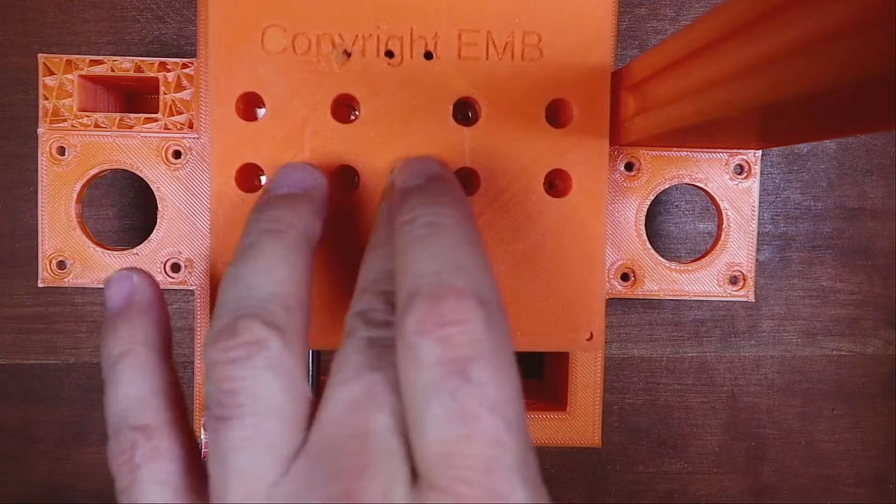So let's see, anybody show up yet? Probably going to be a couple seconds. Nobody knows.

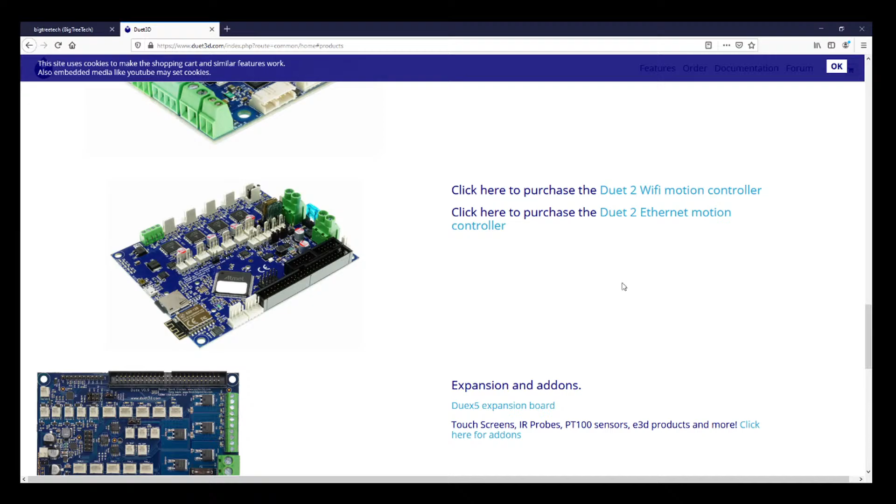So we've got config tools, compatible boards. Let's take a look at that. So there's the Duet, I don't have that. I don't have that either. Let's see, all these are Duets. Let's see what we've got for firmwares. Doesn't look like it's actively being developed, but it does say 32-bit processors. Let's see what we've got for software here. Reprap firmware. Says the documentation, drivers. So maybe this is not the best firmware to work with.

So let's see what firmwares we can use for 32-bit boards.

Okay, so let's see what we got here. All 3D printer firmwares, which to choose and how to change it. This might be kind of interesting, or it might just be painful.

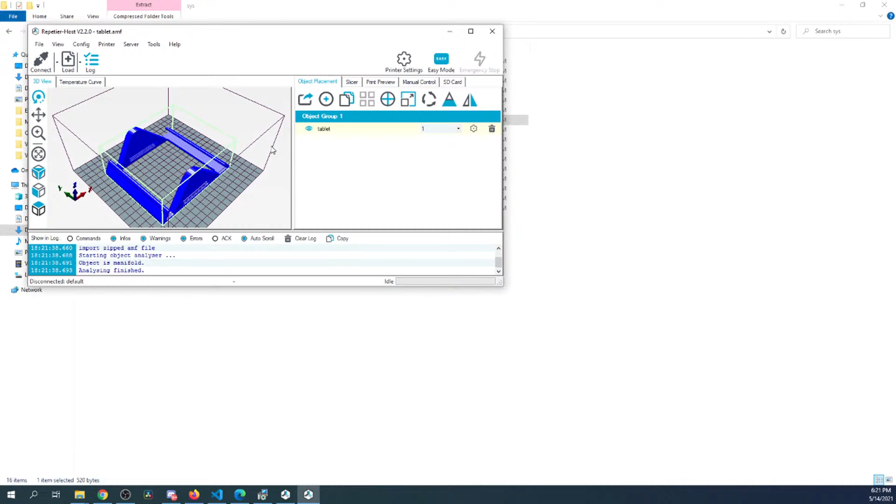So let's say we accept. That looks like a printer to me, or part of something. Might be holding filament, but it looks like you're rendering in here.

Kind of a smooth transition. Looks like there's a slicer here. It says the quality. You can add a brim. Let's see if we can re-render this.

Doesn't look like we can do much. Touching bed. Cura's the slicing engine, I guess. Or we can use Slic3r.

Yeah, it looks like a holder for a filament. It's asking me to say where the slicer is, so let's go to the desktop.

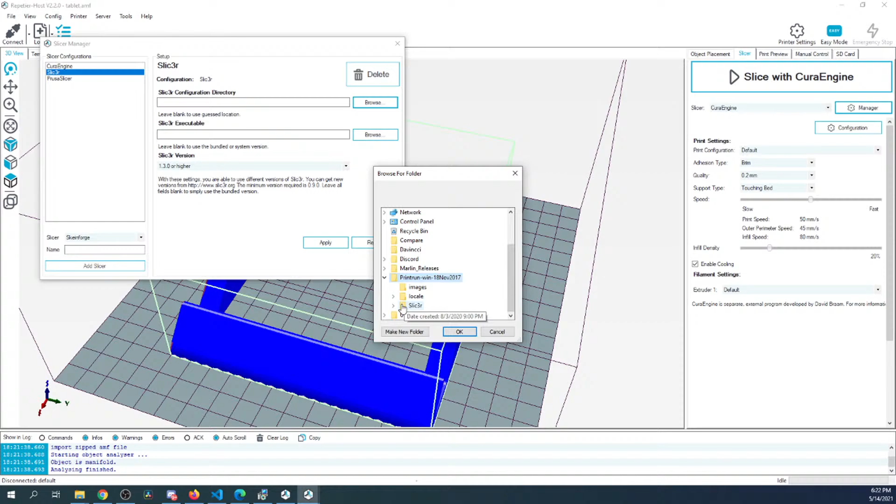So it's in here. This is an old slicer. Let's see if it grabs it, apply it. Let's see. It's looking for the executable.

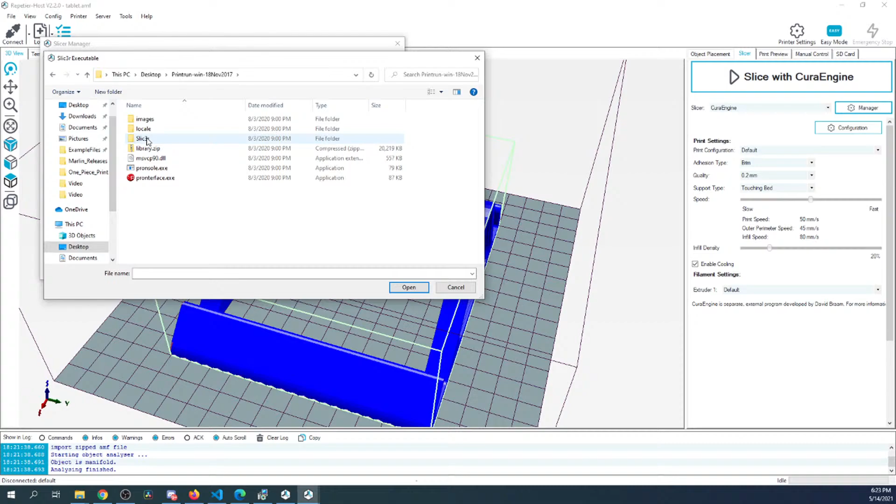Desktop. Slic3r. That's awesome. Slice, maybe?

Anyways, this might be harder to use than I thought. Let's see what the configuration manager says.

So these are start and end. So it's turning off the heat bed here, and there should be something to turn off the extruder, which is right here. So it's setting the first extruder to 0. That's the G code for it. So that's not very interesting.

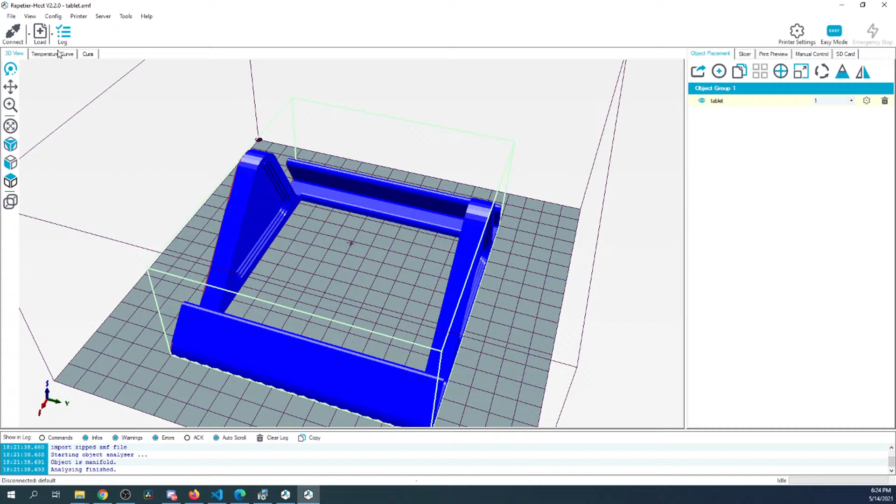So let's see if we can figure out what's going on over here. Apparently we can watch stuff. There's Cura. But it's slick looking, but I don't know how well this works.

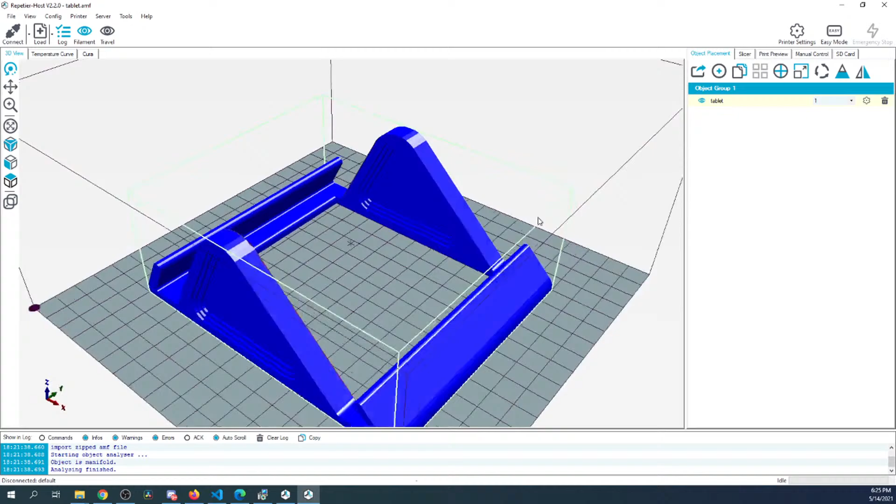Let's try easy mode. Looks like I gotta click over here to move something. Maybe it's export. Test.

I just installed it from scratch just to see what would happen. It's not very fun for me to use, so let's see if we can open this and see what happens. So apparently that might be the file.

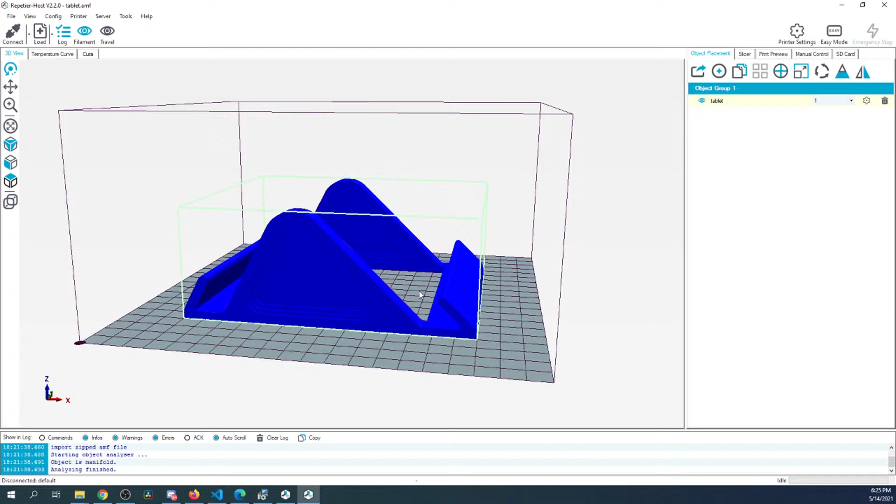Let's see if we can move it around. Add object, scale object, scale maximum. Let's see, 50%.

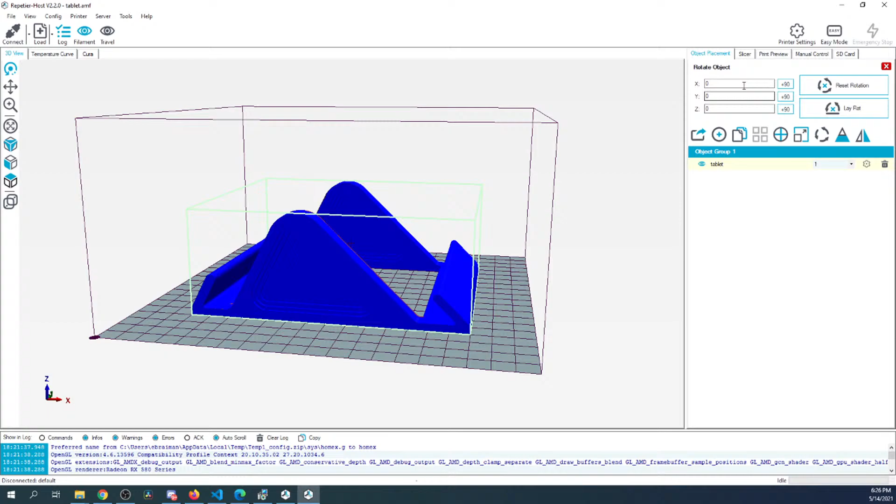Let's try 75%. Well, that's not too much fun. Let's see, plus 90. That's easier to work with though.

I don't know, this slicer does not look like it's usable in most cases. This looks like it's actually connects to a printer, but we don't have one connected at the moment. So maybe we could try that.

Yeah, but so far it's not very interesting software. So I'm gonna plug in an actual board and see if this shows up. So you can hear it.

Let's see, COM ports, it's probably 13. Speed is probably correct. So let's apply. Say okay.

Apparently I can't send any G codes. Awesome. Huh. Can't get in here.

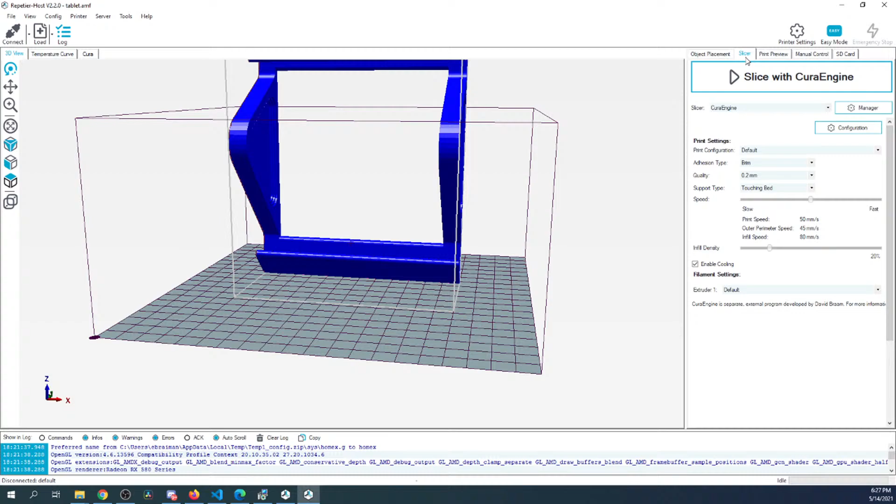Looks like it's pointing to slice with CuraEngine. Cooling's on. Manual control. Why is that not working?

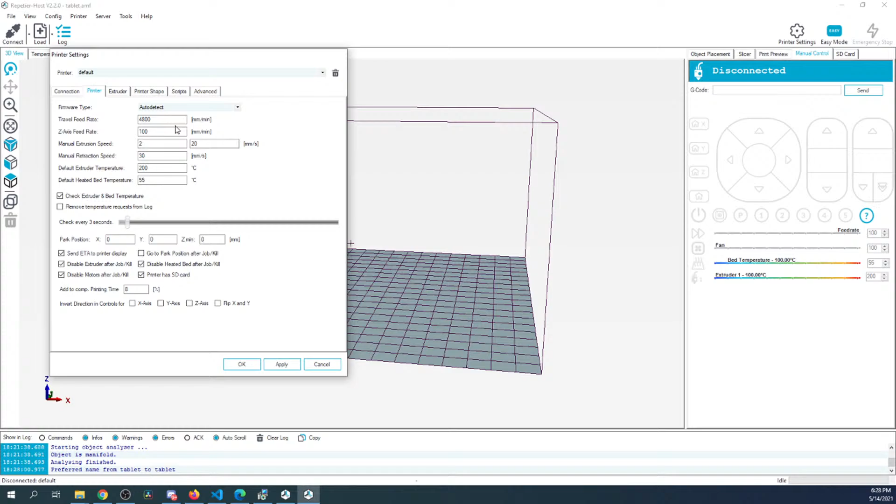Let's see. Printer. Extruder. Shape of the bed maybe. Scripts advanced.

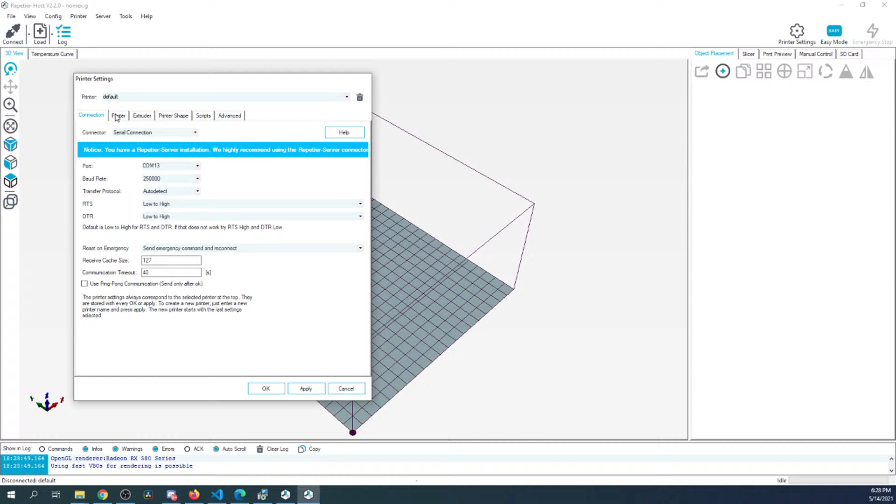Let's try reopening it. It might be web-based too, and that might be why I'm having trouble. So I might have to change the address. Or I have to somehow register it.

You have to click connect on the left. Oh, yeah, I'm looking over on the right. Let's load a file.

Connect doesn't work. Let me check the board. The board looks like it's on USB power, so it should at least show up. It's on the right port, I think, so let's check that real quick.

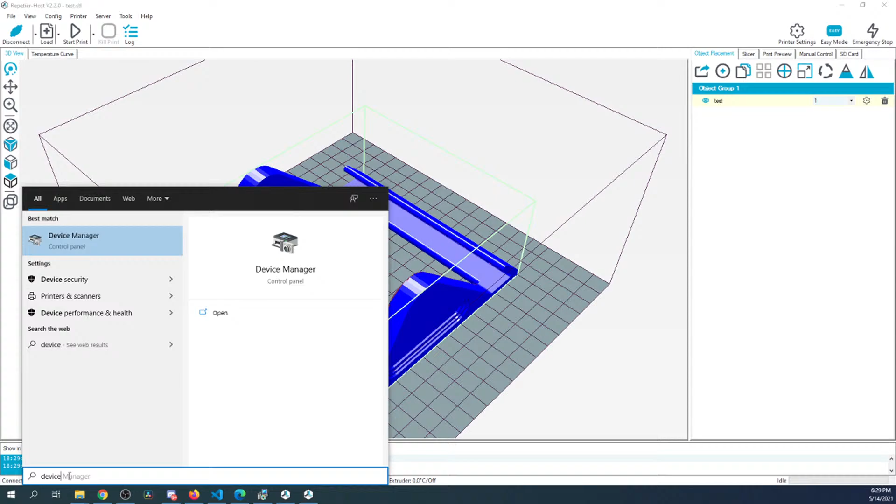So if we go to Device Manager, and I slide this over, go to Ports, it's 13. So why is it not working? Oh, it says connected right now.

So let's try G codes. Manual control, there we go. M119. And that shows us nothing. So there's got to be some kind of output display someplace in here.

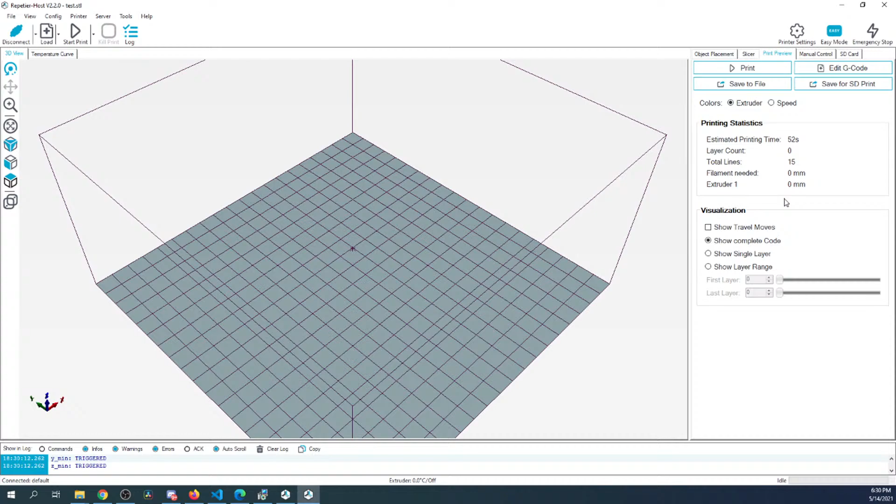Manual control. So they give you the ability to send a G code but not see anything.

Let's try echo. Let's try this again. M119. Oh, sorry. Did not expect that.

That's where it's showing up. So obviously I'm not seeing things.

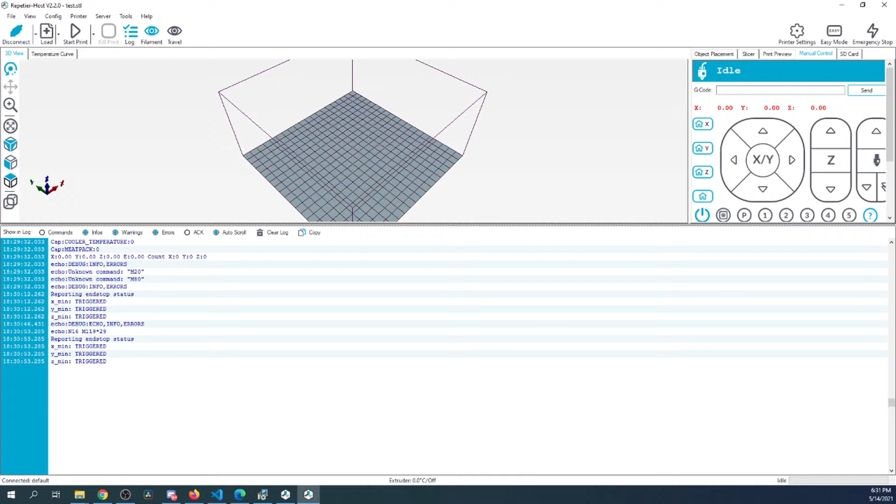I would try heating, but there's no heater. I'll show you what I'm working with. So if I go over to the workbench, that's all I have connected right now. So I'm just checking the outputs to see if they're working.

So I'll connect an end stop switch just so we can see what's occurring. So let's pull that out for a second. Let me grab an end stop.

And I think voltage is on top on this one, so this is X minimum. So let's double check this before I power it and cause my board to explode.

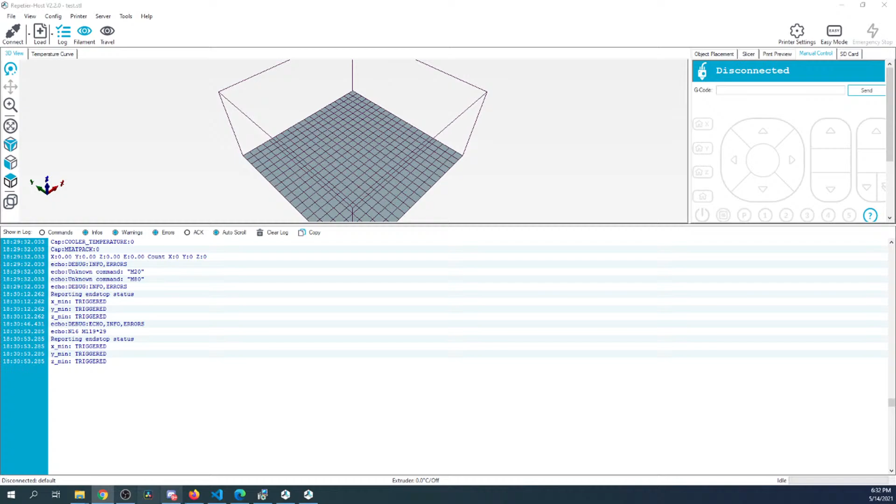So let's go over to the browser for a second and verify this real quick. So inside the browser, go over to Big Tree Tech, we'll check to see what we've got.

Let's see, hardware, and we'll look for pinouts. Then we have to scroll over on this one, and 5 volts is on top, signals on the bottom. So we're good there. So let's try this again. Let me readjust the size here.

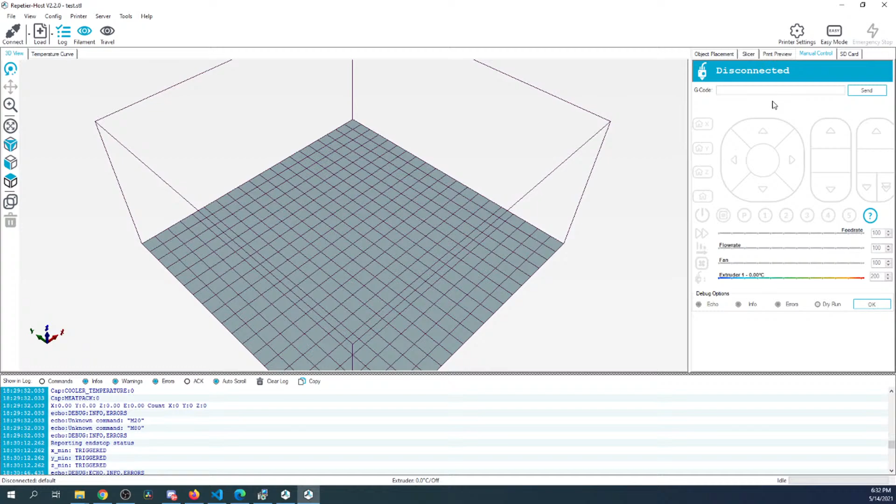And it should say, instead of triggered, it should say open, hopefully. So let's see what happens. Let me make sure that you're in, well, we're disconnected, so that's not smart. So let me bring you over to where I am here. I'm just powering up the board with 5 volts. We'll check the connection.

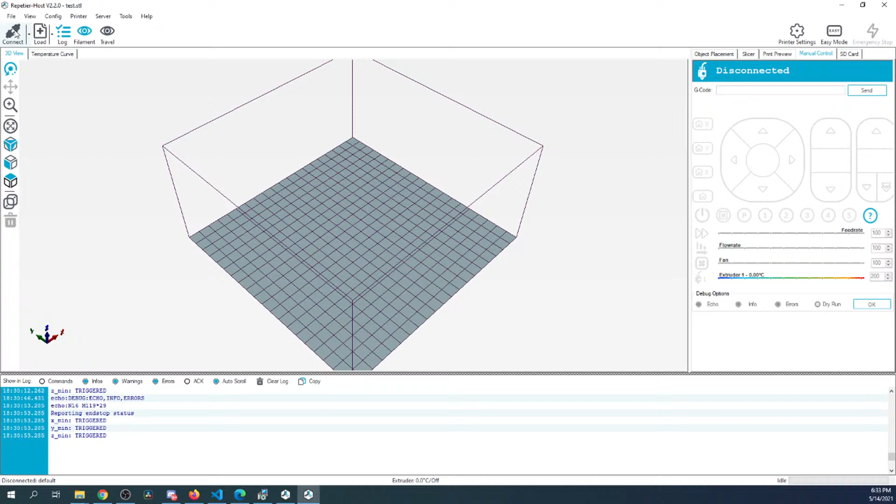Looks like it just came online. So let's do an M119 again. And it says everything is triggered, so it's like it's not connected. So I'm going to show you that it's connected, hopefully. So let's go over to the workbench. We have this. I'm going to click down. It's got a little light coming on. I know it's hard to see.

So let's go back over to the desktop to see what's going on. We're going to do M119 again. And it says open. So it is working, but it seems to be working the opposite. And that could be because I loaded firmware that makes it think that it's not using that end stop the way that we think.

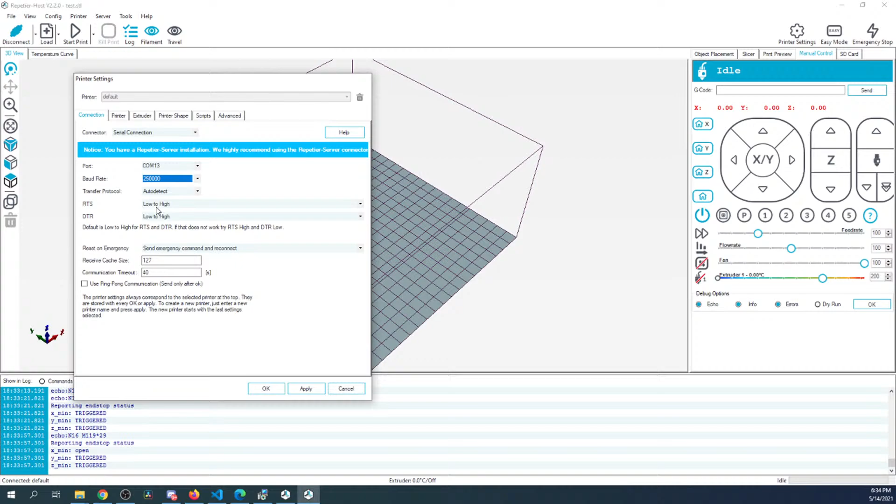But hang on a second, let me get the mouse where I can actually see what's going on in the chat. Yeah, so the baud rate is easy enough to figure out. If you go over to printer settings, there we go. Connection, we know that it's COM13, we know the baud rate, and it's auto detect. So these settings I'm not too sure about, but they're probably buffer or something. So we know we're connected to the board because it's giving us a connection symbol in the upper left hand corner.

But all in all, I'm not super impressed with this, just because there's a lot of things I don't know what's going on. So, turn off the operating current for all motors. This can change the position. So it also looks like you can move both motors at once here, or you can move one of them. So let's select one. Oh, still looks like you're only going to trigger one thing. So let's see what happens.

Oh wow, that's kind of cool though. At least you can move 50. Kind of like that display. This only goes 10. That's saying how much filament to extrude, I'm guessing. And I'm not sure if that's a second actual extruder. Feed rate controls, flow rate controls. Looks like there's a fan control. And then extruder temperature.

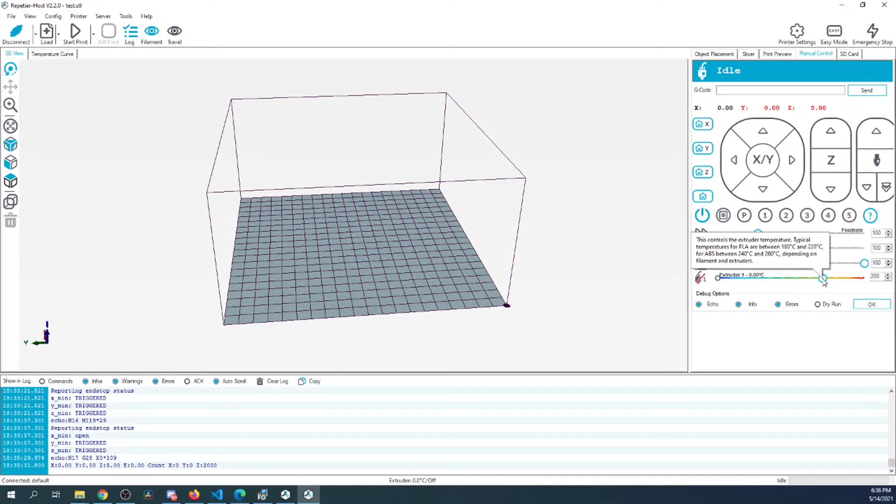So slicing. So it looks like that's how you slice. I don't know where the file is being created, but that looks like what we just created because it has a little base underneath. So maybe we can edit the G-codes. That's kind of interesting. So you can actually see the movements of the printer here. And at the very end, you'll see like an ending script where it shuts things down.

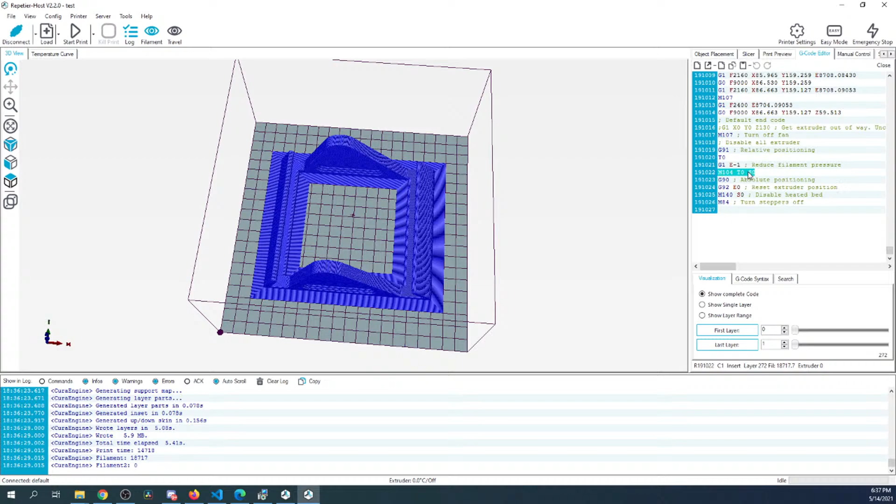So turn off steppers, disable heat bed, and then there's power off the extruder heat here, I believe. I don't know why there's not a comment. We can double check this though. We can go over to Marlin and check the G-code real quick.

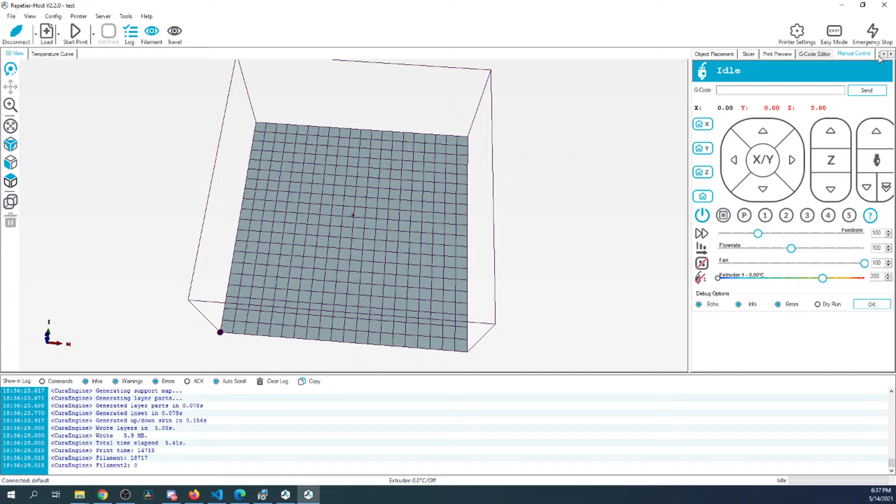So if you go to configuration, let's see, G-codes, and we find M104, set hot end temperature, so it's turning it off. So it's setting it to 0 for the first extruder, which is 0. So those are the commands. Let's see, manual control. There's more over here. SD card. So I guess you can push a file to the SD card.

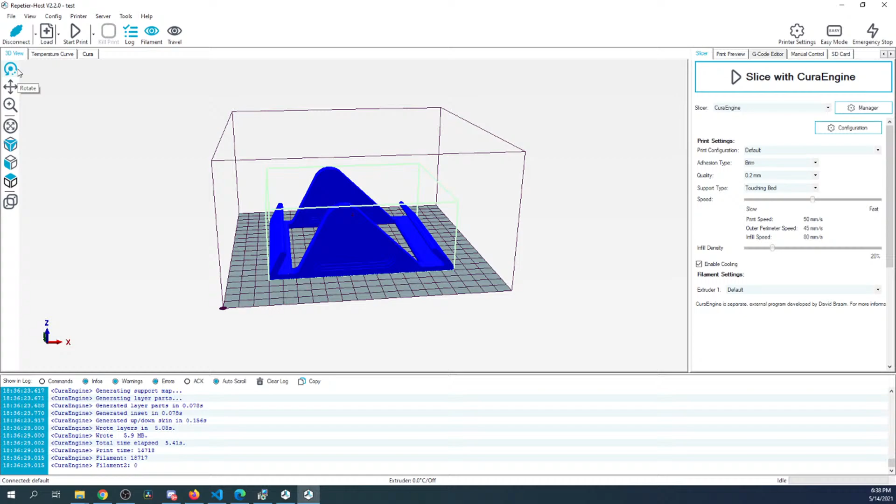Let's go back to Slicer and see if there's anything we can change here. Well, a lot of the settings are not very easy to see. Let's see, structure, advanced. Yeah, I'm not picking out too much on here that is easy for me to work with, but I'm sure others might enjoy this. But that's the original. Let's see, rotate. Doesn't work very well. Yeah, it looks very hard to work with.

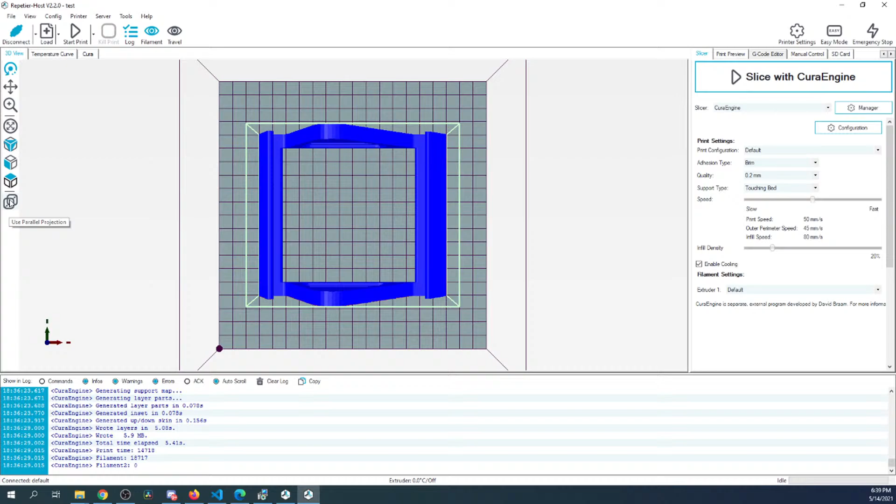Isometric view, that means that you're seeing things in 3 dimensions. That's one side's view. Or that's top view. Oh, that's the use parallel projection. Not sure what that's for, but it looks like it's showing printer volume. Temperature curves, I'm guessing this will show you what's going on with each one of your heaters, your bed. Target temperatures, averages. We could probably hook something up, but obviously I'm not super comfortable with this yet.

Here are the Cura settings in here. Apparently they kind of align them up. Kind of like Pronterface, I guess. Or Slicer. Still don't know what that means. Let's see. Filament travel. I thought there was a setting for putting a bed underneath it. That looks interesting. Easy mode. So let's see if we can find the old Cura, or not Cura, the Slicer.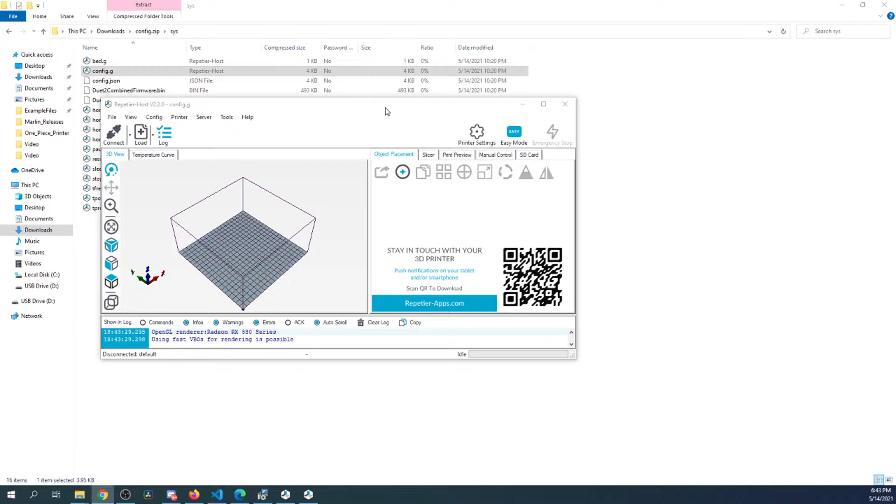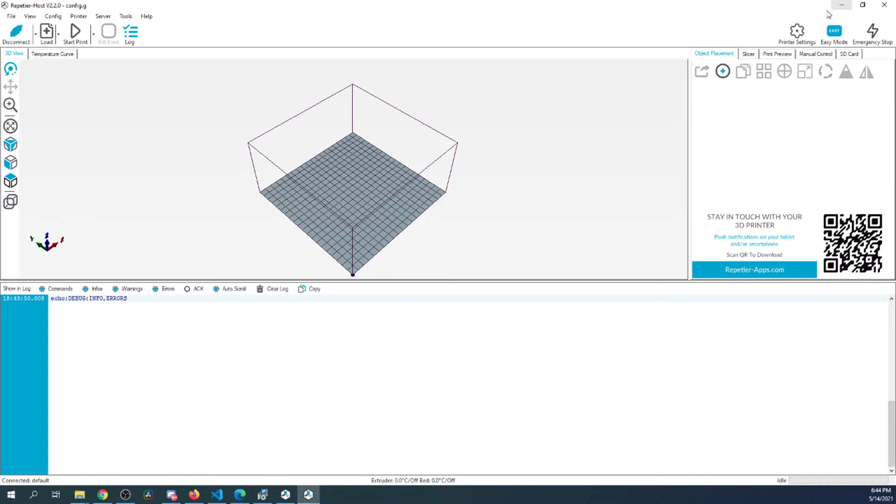Let's see those dots? They're under the Slice with Slic3r. So dots. Okay, it's connected. No, I'm just trying to find the dots. Let's see, clear log, show log, commands. On the right. The slicer. Slicer. I don't know, it doesn't give a very good acknowledgement of what you're working with, so let's try this.

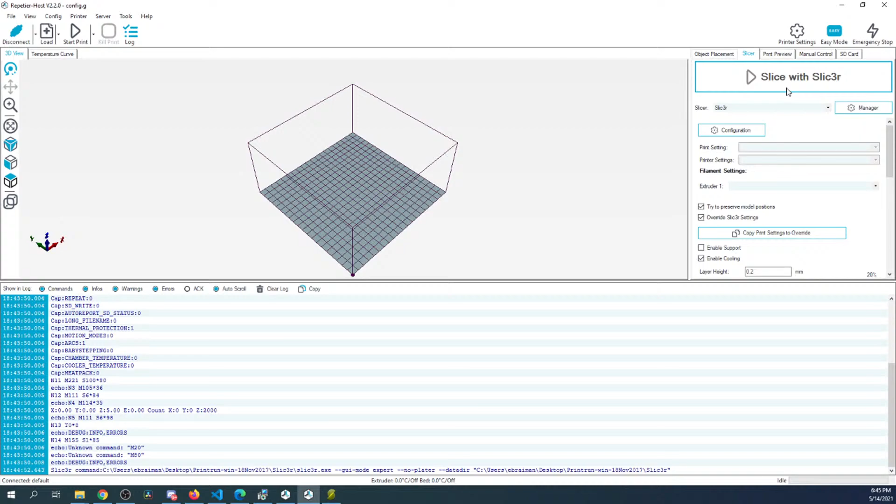Oh, it's got honeycomb. That's one of my favorites, is honeycomb. But a lot of people like Hilbert curve. So, 3 dots. It's the logs. Originally I thought there was a firmware for this, but I don't know where it is. Awesome. But you guys have any questions so I can talk about something other than Repetier, because you're seeing me struggle with it.

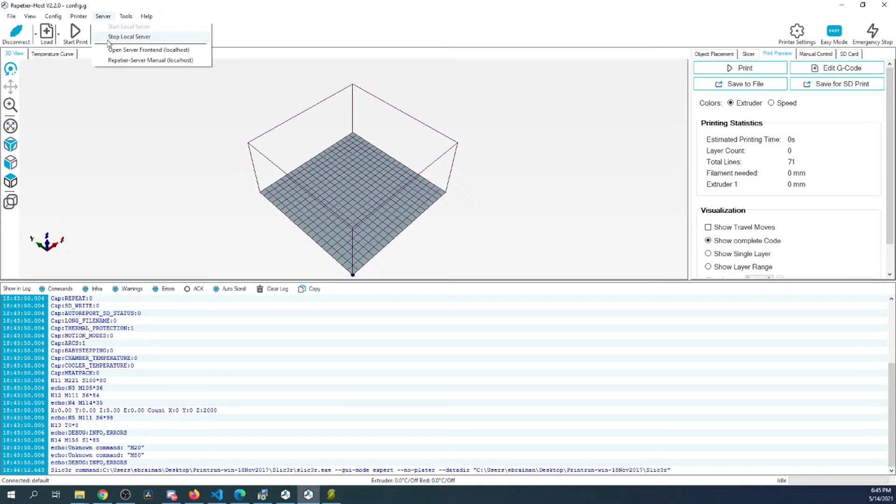Add new printer. SKR. Marlin firmware, serial connection. COM port 13. We'll do auto detect. Continue. Just want to see if this works. It's not looking like it's connecting, but the baud rate is wrong. Try that again. Yep. Sorry, the messages keep scrolling down to the bottom now.

On the right, I'm using a ramps, and it has issues. What are your issues on the ramps? Let's see. No detectable device. Maybe I'm already connected. Let's try disconnecting and closing. Finished. Finished. Oh, here comes Repetier host. Let's try connecting. That's why I couldn't connect. It already had a connection.

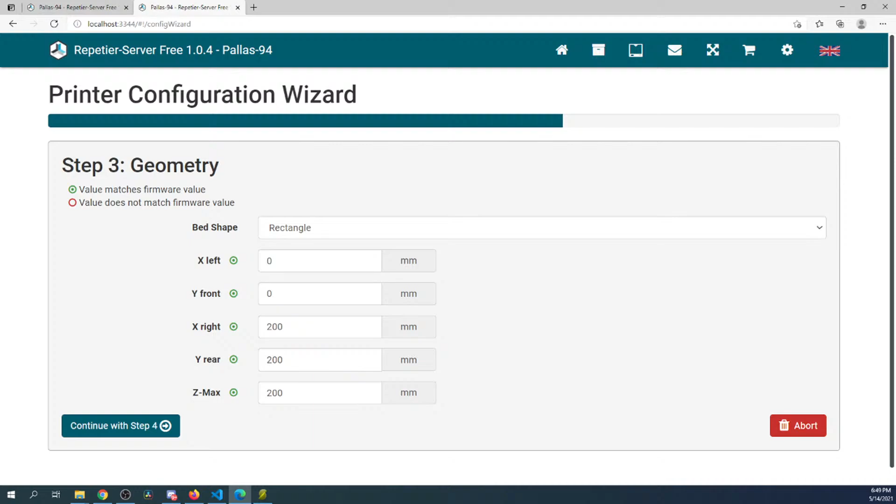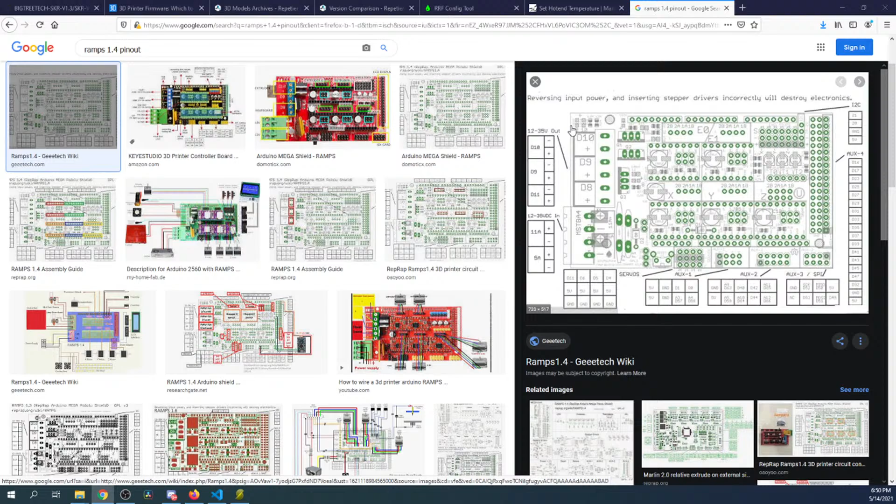So let me bring up an image of this actual printer and close this down for a second. So if we go over here and we say ramps 1.4 and then do pinouts. Are you talking about over in here? The MOSFETs are getting too hot? Or are you talking on the steppers? Okay, so what's the voltage of your heat bed? Because I think this image might have issues. Let's see if it's this one.

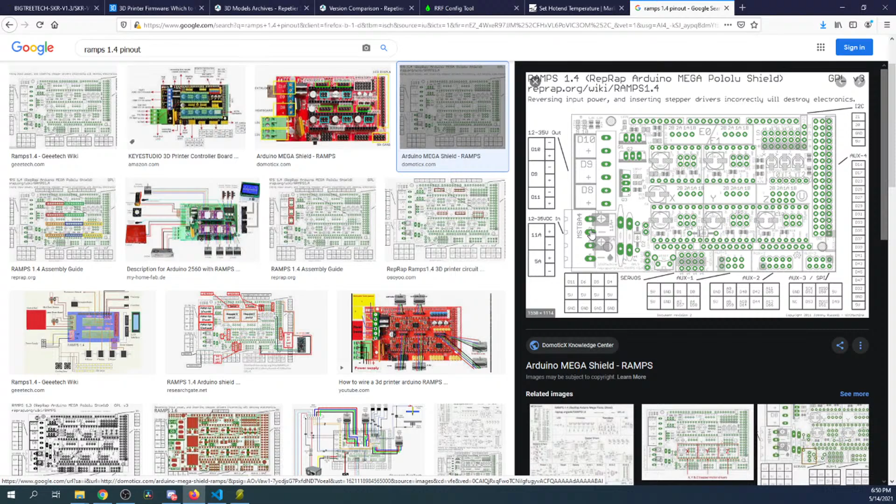Because that is incorrect. 12 or 35 volts. It should only be able to do 12 volts on the ramps. So that might be a problem. Okay. And then what kind of bed do you have? And what's the resistance on the bed? I don't know why these are incorrectly labeled. That's super interesting to me.

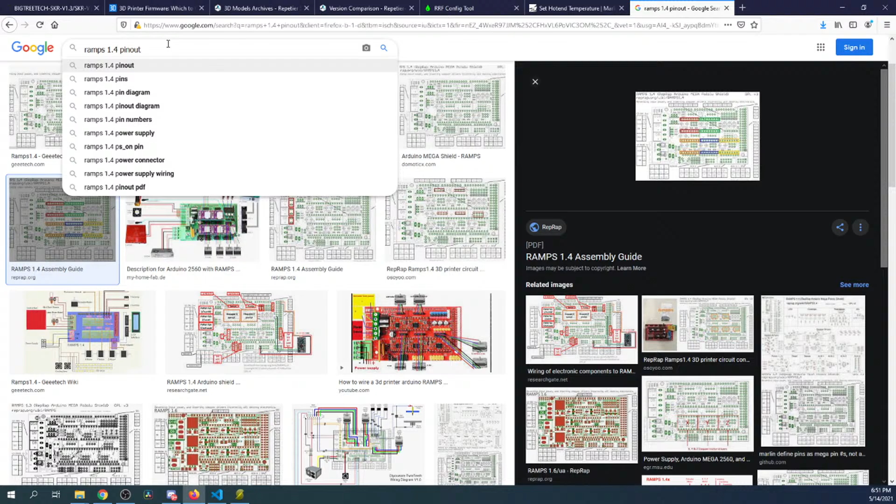Let's go to Reprap and see what's going on. Let's see. Pinouts. Let's go to the board. Ramps 1.4. Go to ramps 1.4. You can check the voltage.

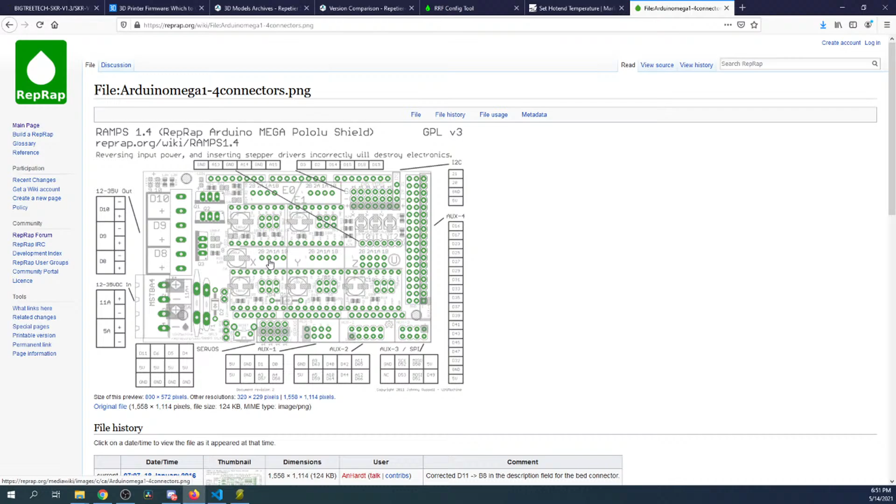Interesting. I don't know when they changed that. Originally it was only 12 volts. I just might not know what I'm talking about anymore. So you're running 12 volts to your board for your heat bed. What's the thermistor on your heat bed? Is your thermistor working correctly? Has anything been disabled or enabled to make it work?

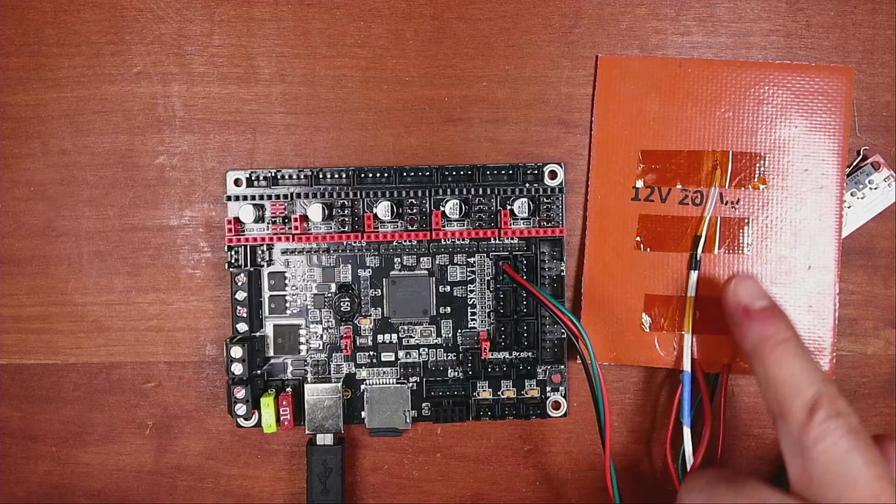Here we go. So I'm going to use the heat bed that I'm using right here. And I'll bring the camera up so you can see what I'm talking about. Now the camera might power off. I'm working on that problem. The thermistor is located right here on my board. So I'm going to power this down for a second, and I'm going to connect the board right here. Then I'm going to power it back up. Now it's obviously not going to work for me, and the reason being is that I haven't set up the actual thermistor.

So let's go over to VS Code for a second and see what's going on here. So in VS Code, I'm just going to open in my downloads folder my Marlin, select the folder. I'm going to wait a second for it to load. Then I'm going to go to source boards core. This is a different board, I know, but the process is similar. I'm going to search on the SKR. It's the SKR Turbo, so I'm going to copy that. Then I'll minimize core source, go to configuration.h, search on motherboard, paste it over the RAMPS, change this to -1 so I can load the firmware,

and then I'm going to search on thermistor, and it brings me to the thermistors. Now, first things first, the thermistor in here is for the bed sensor. I know mine's probably going to be 1 or 8, so I'm going to go with 1 and plug this in. And then I'm going to also check on thermal runaway. So these should be enabled always. Do not disable them, because this will keep you from burning down your house or harming others by accident. So always leave these alone.

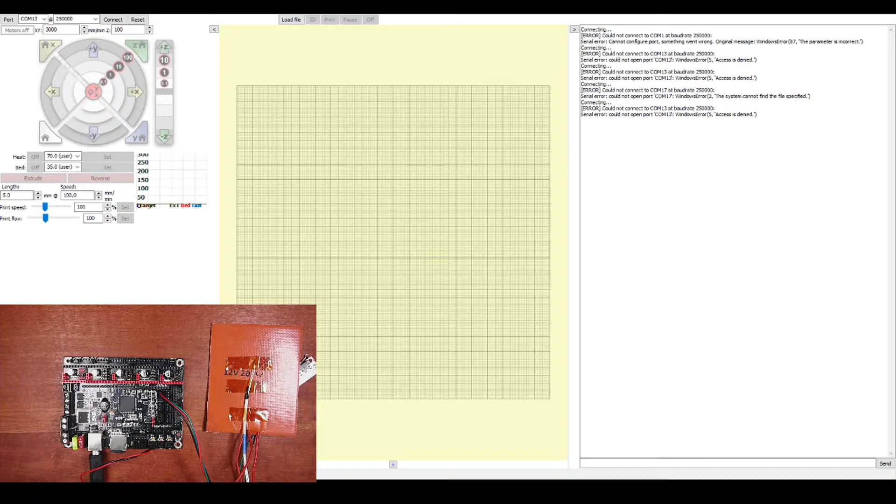That's awesome. I can't tell if it's there. So what I'm going to do is I'm going to have to figure out what's going on here. So let's check to see what we've got going on. We're connected, so that's good.

And the only programs we've got running are Discord, Firefox, platformio.ini. That shouldn't be connected right now. So I'm going to close this and reopen it. And it looks like the port is still denied.

So what I'm going to do is disconnect, reconnect the port, and hopefully we'll lose that connection that's causing the issue. So I'm going to pull the USB and move it to a different port. Hopefully it'll re-enumerate. So then we'll check Device Manager. Inside Device Manager, it's still 13. Let's try connecting.

So let's go over and check VS Code, see if I made a mistake there. I think the issue has to do with loading Repetier. So we'll check on motherboard. So the speed's correct. -1 is correct. So what has changed?

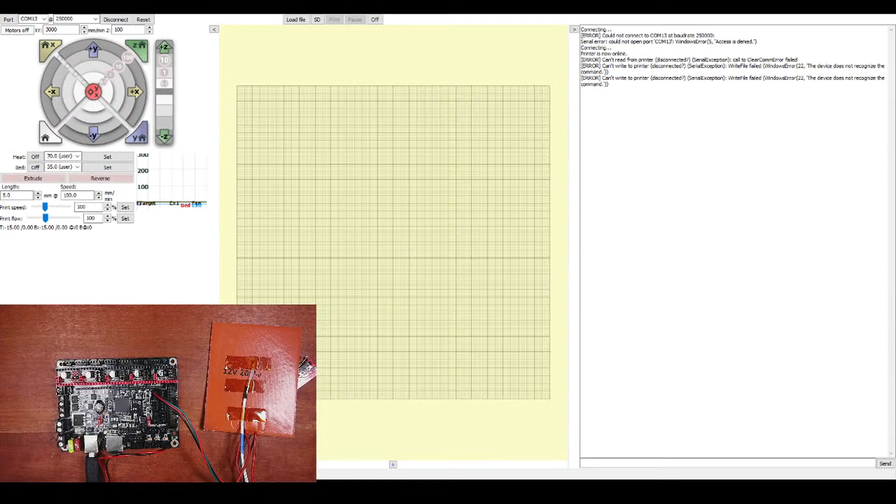So I'm going to reconnect, then I'll go back over to Pronterface. I'll disconnect, reconnect, and now it looks like we've got a little bit of temperature there, so I'll put my finger over it again. And you can see that it's going up to my body temperature. So that's one way you can test this. Testing it with continuity is kind of painful because it doesn't work real well.

Let's see, serial port should be -1 for the 32-bit boards. For the 8-bit boards, it's going to be 0. I know that's a little confusing. Let's see. Yeah, I think you guys were yelling the answer while I was working on that.